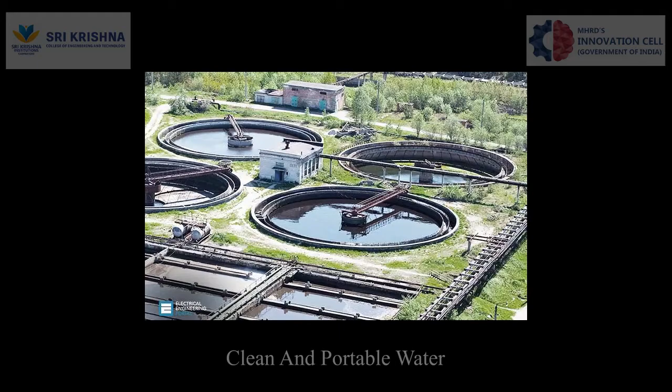Water pollution is the serious ecological problem we face today. Many countries are facing critical challenges to supply clean water without any pollution. Due to industrial development and changes in the manufacturing process, the water gets highly polluted and changes its physical and chemical properties, which creates harmful effects on all living organisms.

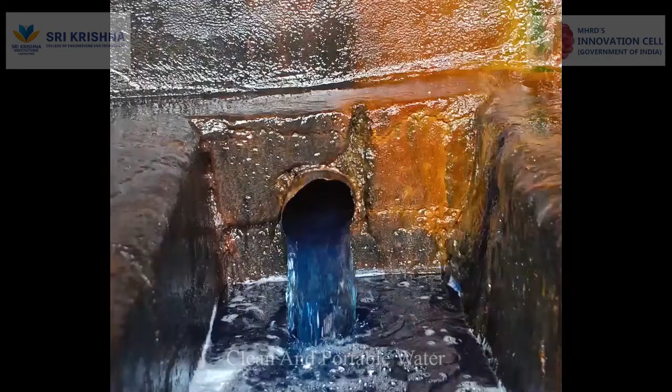Sugar mills, electroplating, tanneries, dyes, etc. are the major polluting industries which generate too much volume of wastewater with high toxic contaminants, disposed into natural water bodies without prior treatment.

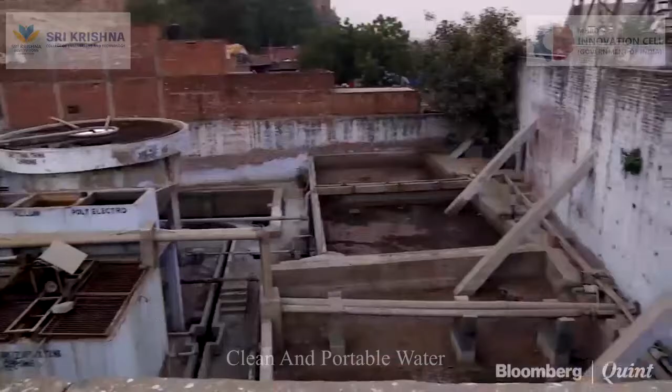A common ground for pollutants is their mode of entry into the water system. The waterways are subjected to entry of pollutants by direct discharge into the river water system, reactions and transport across the air-water interfaces, runoff and seepage with subsequent transport, and reactions and transport across the water-sediment interface. Under all conditions, entry of the pollutant is either in dissolved or particulate form or may be converted to these forms by chemical reactions.

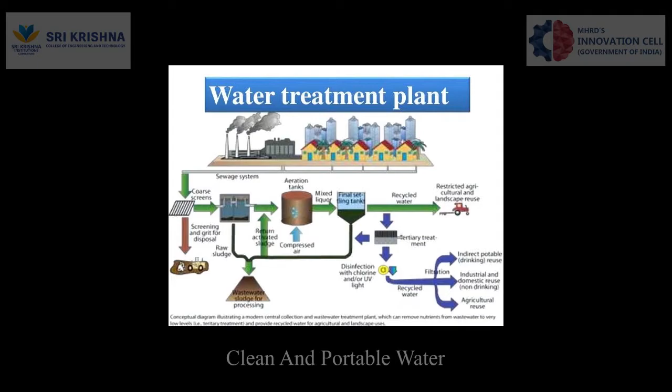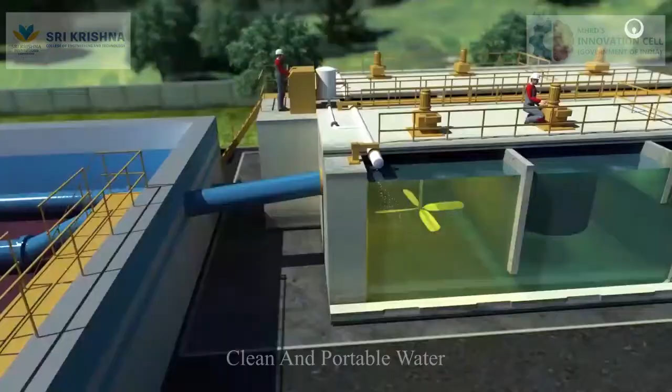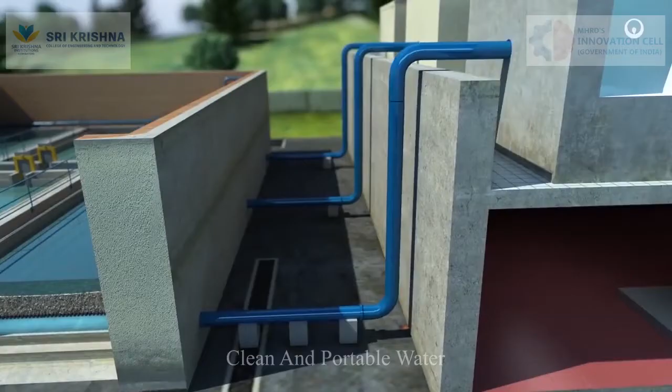There are many methods available to treat the wastewater, and they are generally classified into three different stages: primary, secondary, and tertiary treatment processes to remove specific contaminants. The water treatment methods used by industries are generally the same primary, secondary, and tertiary treatment methods used by municipalities. Many industries release wastewater of fairly uniform or predictable quality, and as the exact pollutants are known, it is often possible to choose the best treatment path for those particular pollutants. As new methods are invented or old methods improve, an industry can change to a better treatment.

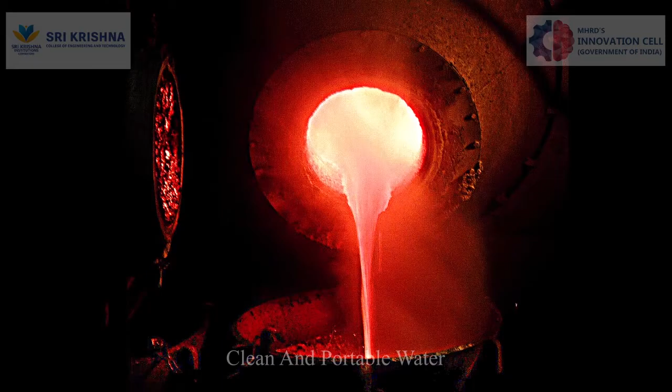Effects of heavy metal pollution. Mercury. In 1972, 300 persons were officially listed as its victims. Industries on the bank of the Kalu River, which originates in the Western Ghats, release a lot of mercury and lead. A child who drinks 1 liter of water consumes 35 ppm of mercury in a week. Over a period of several months, this leads to the accumulation of over 0.3 milligram of mercury, which leads to Minamata disease.

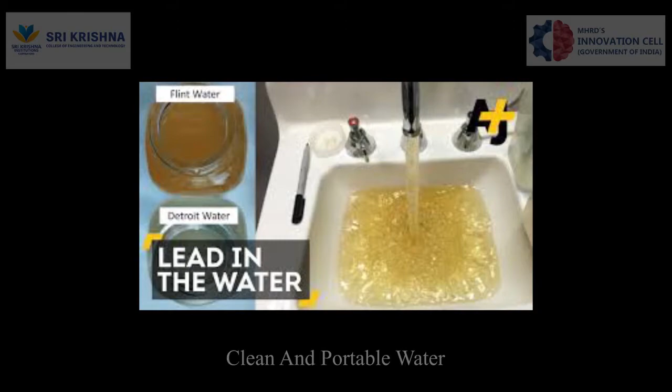Lead. In the last century, the mining and smelting of lead has increased above the prehistoric level. All this has led to mental disturbance reflected by crime and cultural degradation. Tap water contains quite a large amount of lead. Zinc. Even though zinc is an essential requirement for a healthy body, excess zinc can be harmful. Generally, increased exposure to heavy metals in the environment increases the risk of developing cancer. Chromium. Chromium is dangerous and may cause health problems including allergic reactions, skin rash, and nose irritation.

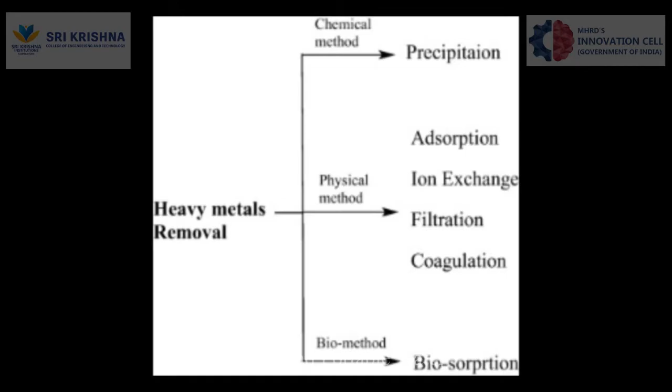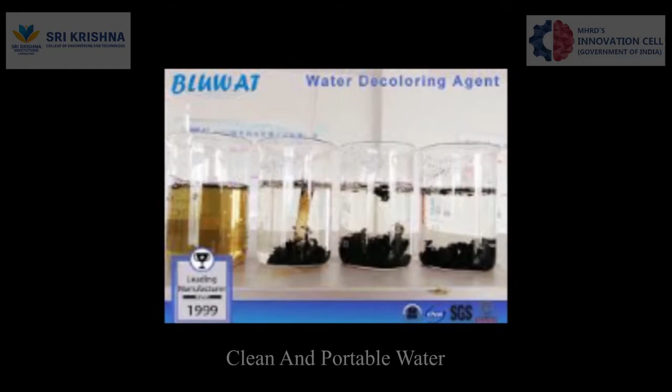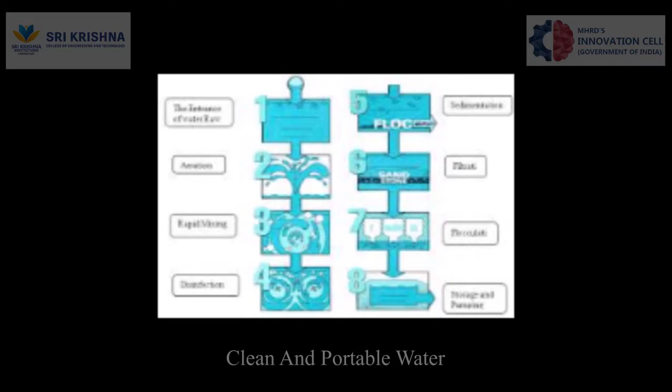Methods of removing heavy metal ions. Removing or reducing the heavy metal concentration from the aqueous medium is one of the challenging tasks for researchers. There are many methods suggested by researchers and scientists to remove accumulated heavy metal ions from aqueous solutions as well as industrial effluents. Due to the lack of laboratory facilities, the need for skilled persons, the availability of various chemicals, and the cost of the treatment process, many of the methods were not used efficiently by researchers.

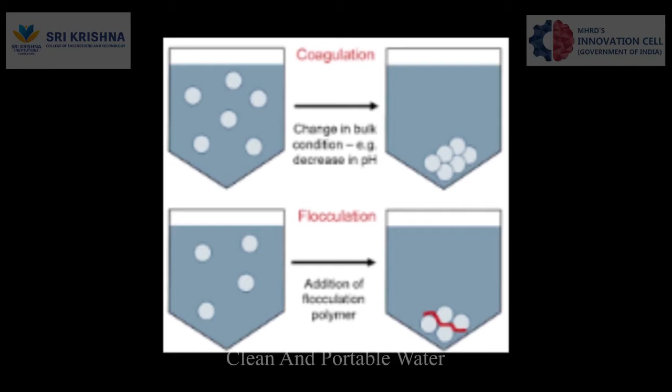The following are the major treatment methods used in recent days to reduce or remove the toxic metal concentration from the aqueous medium: activated sludge process, chemical precipitation, coagulation and flocculation, electrochemical treatment, ion exchange, membrane filtration, and adsorption.

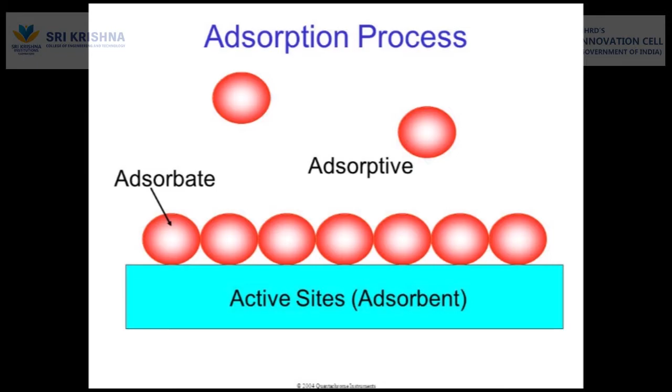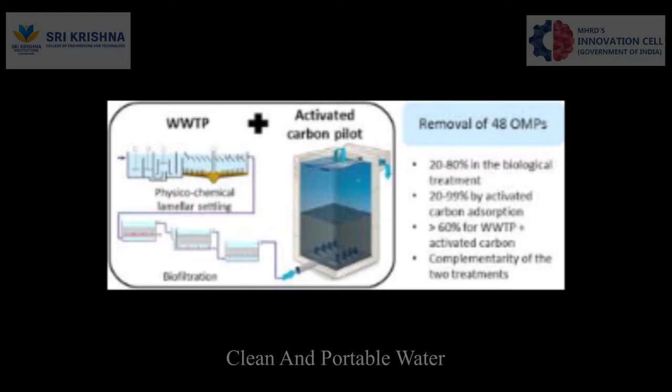Adsorption process. Adsorption is the adhesion of atoms, ions or molecules from a gas, liquid or dissolved solids to a surface. This process creates a film of the adsorbate on the surface of the adsorbent. Adsorption is a surface phenomenon, while absorption involves the whole volume of the material. The process of adsorption arises due to the presence of unbalanced or residual forces at the surface of the liquid or solid phase. These unbalanced residual forces tend to attract and retain the molecular species with which they come in contact.

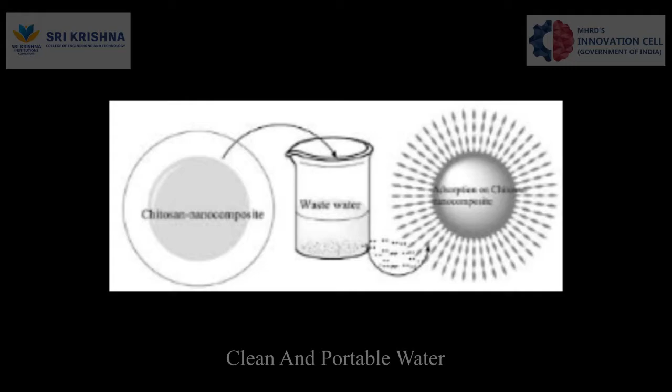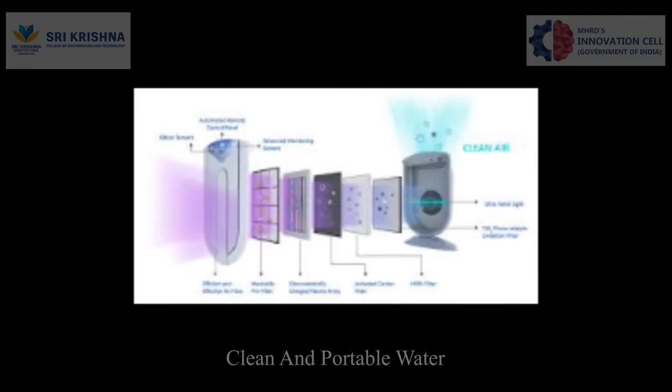Adsorption plays a significant role in many fields and promotes numerous chemical and industrial applications such as mixture isolation, air purification, water and wastewater treatment, industrial electrochemical cycles, heterogeneous catalysis, sugar processing, processing of vegetable oils, poison gases in the gas mask, etc.

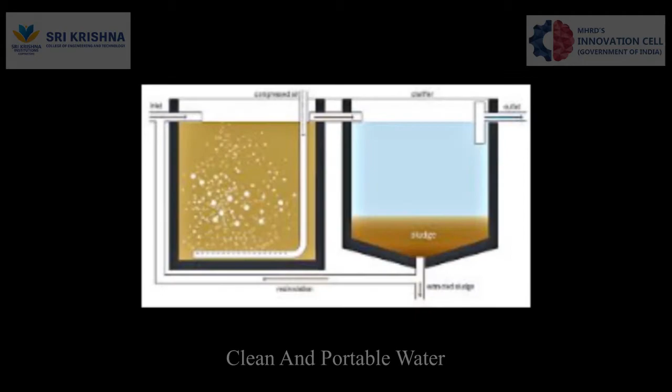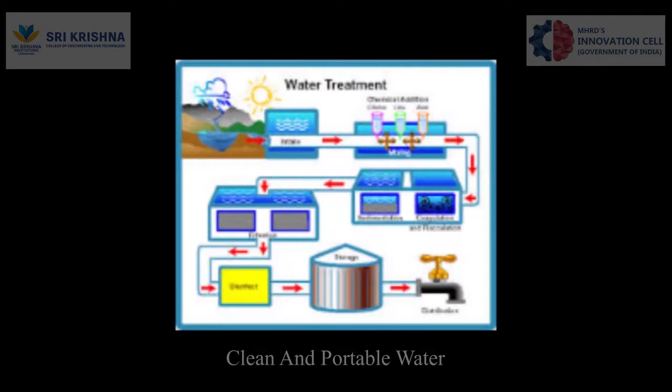It has advantages over the other methods. The design is very simple and the investment is also very low. Very low sludge is produced during the treatment process, but the activated carbon used in this technique may affect the adsorbed solids and desorption takes place. The other conventional treatment methods are successfully used for wastewater which contains a high concentration of heavy metal ions, except the adsorption process. It is difficult to attain the permissible limit of heavy metal ion removal from wastewater at low concentration.

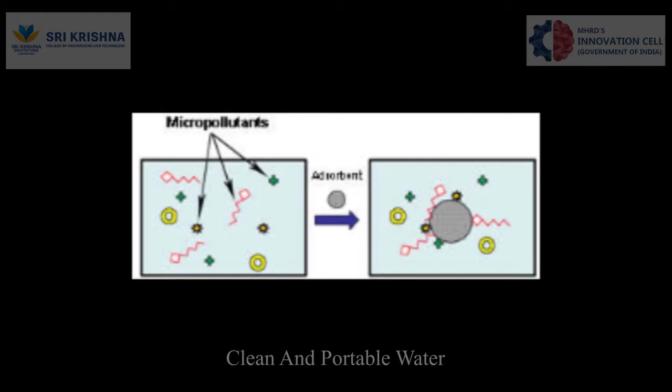The conventional methods are not effectively used due to the low efficiency, high cost and high energy consumption. Compared to the other conventional methods, adsorption has advantages like low cost, insensitivity to contaminants and flexibility in the design and operation. Also, this process does not result in the production of harmful substances as byproducts.

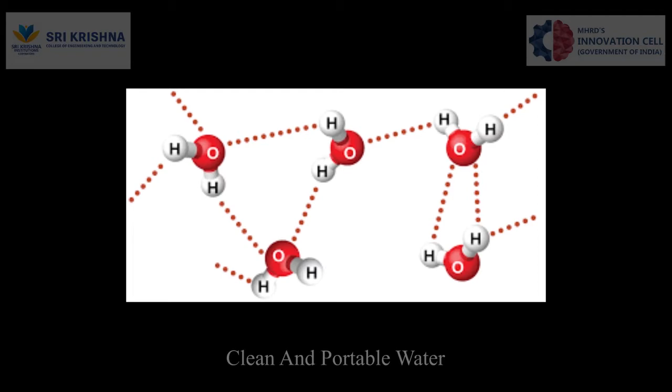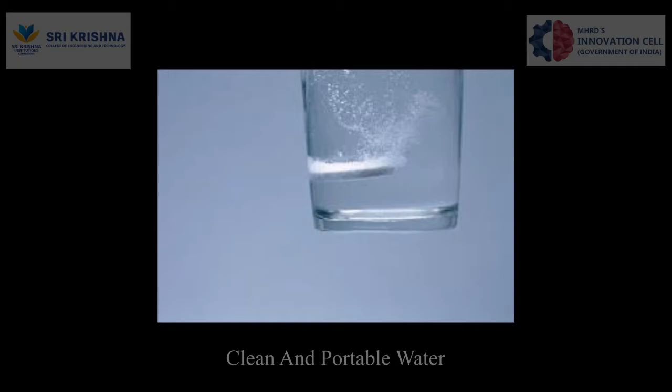On the surface of a liquid or solid, the molecular forces are in unbalanced or unsaturated conditions. To satisfy the residual forces, the surface of the solid comes in contact with molecular or dissolved substances due to this unsaturation. Because of this activity, a higher concentration of a species is present on the surface than in the bulk. This concentration of surface phenomena on any medium is called adsorption.

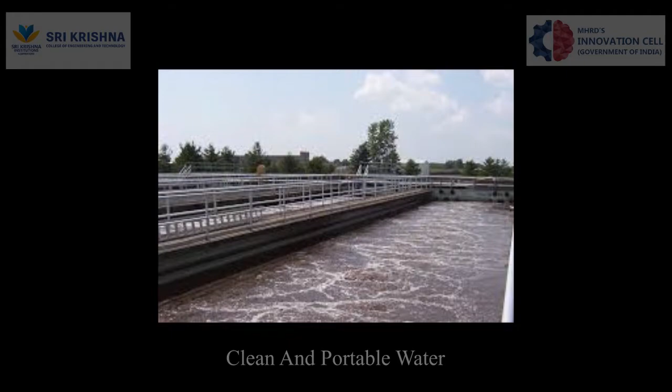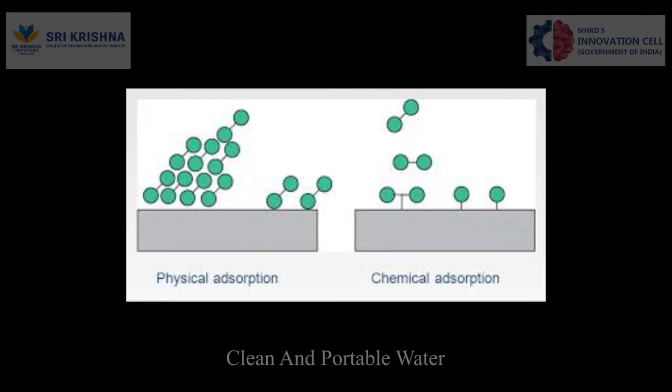This is a unique process to remove the organic and inorganic substances from the wastewater. To treat the biodegradable and non-biodegradable matters in the wastewater, most of the physicochemical methods have been used. The activated carbon adsorption is in both granular and powdered form. The following types of adsorption may be distinguished: physical adsorption process, chemical adsorption process, activated adsorption process.

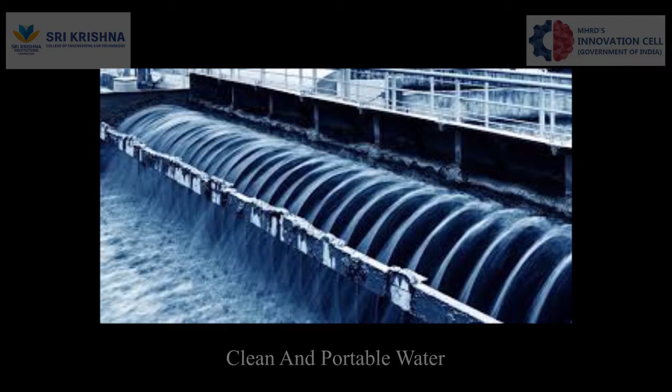From the organic waste, the carbon can easily be derived with very low cost and it's preferably suitable for the removal of toxic contaminants from the wastewater. In this world, the utilization of natural waste is very low and has been a serious management problem. Hence, the production of adsorbent and activated carbon from the natural waste serves many useful purposes.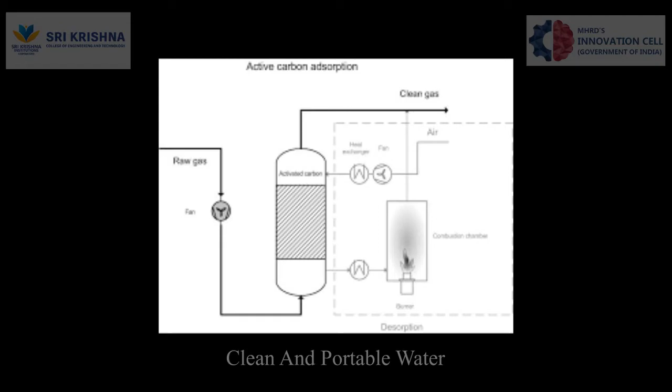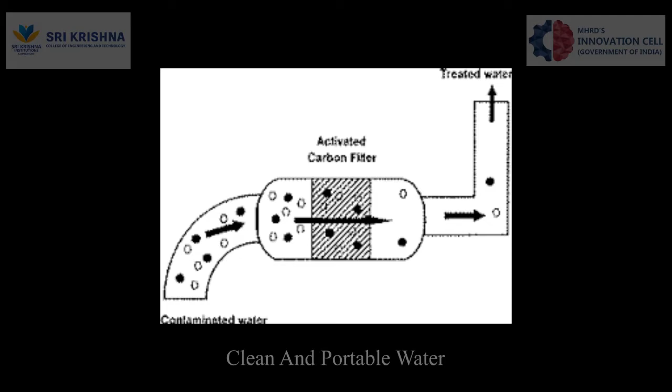The investigation includes batch mode, fixed bed, and column studies. However, the batch studies have been used to find out the adsorption capacity and its efficiency. From the batch studies, the adsorption isotherms are derived, and it is conventionally a preliminary test before starting the column studies.

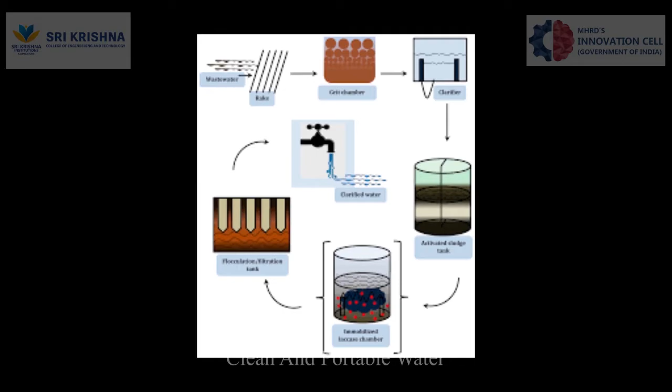Objectives: to prepare the adsorbent from tendu leaves and convert them into the raw powder form, to prepare the granular activated carbon from tendu leaves powder by adopting different activation processes, to characterize the raw powdered adsorbent and activated adsorbent and evaluate the suitable adsorbent for the removal of heavy metals such as hexavalent chromium, lead, and zinc from the aqueous solution,

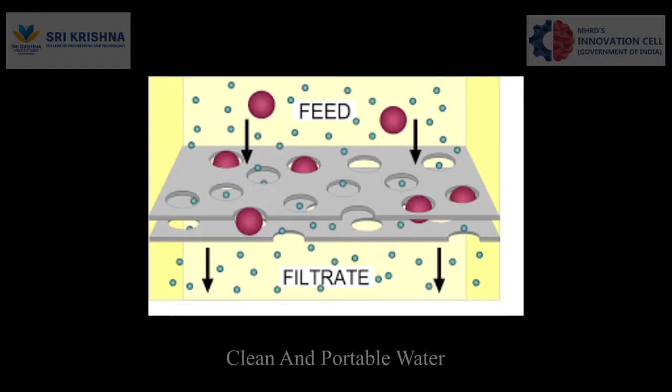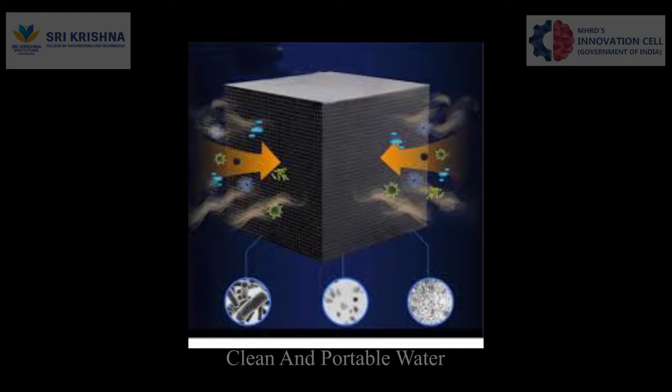to study the impact of variables such as pH, contact time, adsorbent dosage, concentration, and temperature on the adsorption efficiency for heavy metals removal through the batch experiment, to convert the most convenient adsorbent from micro to nano in size using iron oxides for increasing the efficiency of the adsorption process, to study the effect of rate of flow and depth of the bed for the removal of heavy metal through fixed bed column analysis, to apply the optimum condition to the industrial wastewater for the removal of heavy metal concentration.

Tendu leaves. Tendu leaf, which is an ecological contaminant produced during most of the manufacturing of Indian raw tobacco, needs this inquiry. A bidi is thinner and cheaper than a cigarette and is called a poor man's cigarette in India. A bidi is an Indian raw cigarette in which tobacco is wrapped in a cut part of the tendu leaf and tied with a cotton cord.

Tendu leaf is used as a bidi foil because of the ease with which it can be wrapped and its easy availability. It also has a good flavor, tolerance to oxidation, and fire retention capacity. Approximately 7,200 tons of tendu leaf waste are produced annually in the industrial town of Solapur, India.

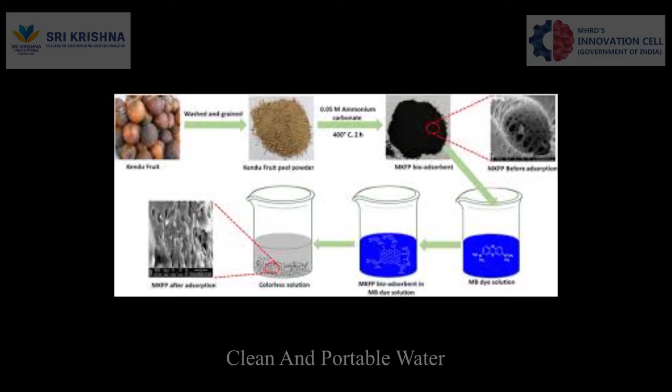Preparation of adsorbent. Activated tendu leaf powder. The adsorbent is cleaned with distilled water, followed by sun drying, and dried in the oven at 60 degrees Celsius for 3 hours. To increase the adsorption efficiency and stability, the raw tendu leaf powder is again treated with distilled water and concentrated sulfuric acid for about 24 hours. Then, this mixture was filtered with Whatman filter paper and placed in the hot air oven at 80 degrees Celsius for about 10 hours.

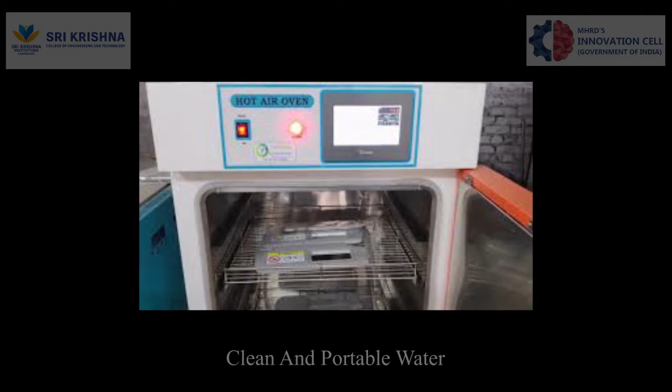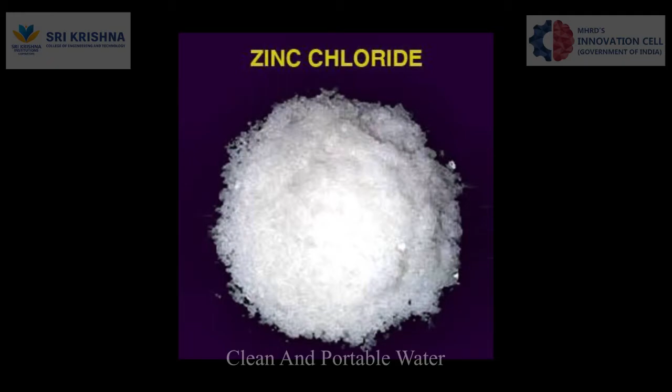Preparation of metal ion solutions. The stock solutions of metal ions such as chromium(VI), lead(II), and zinc(II) were prepared by dissolving the calculated amount of potassium dichromate, lead nitrate, and zinc chloride respectively in double distilled water. To obtain various desired concentrations, the prepared solution is diluted with double distilled water.

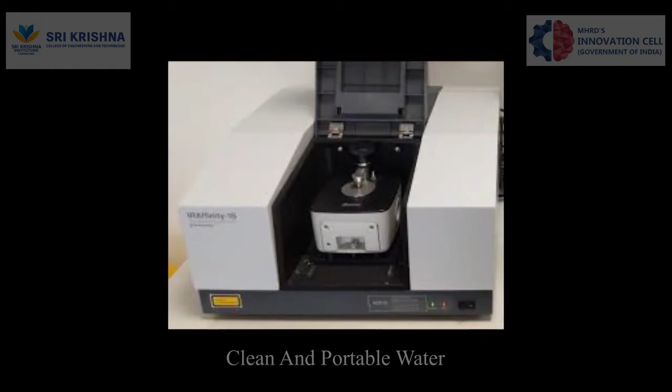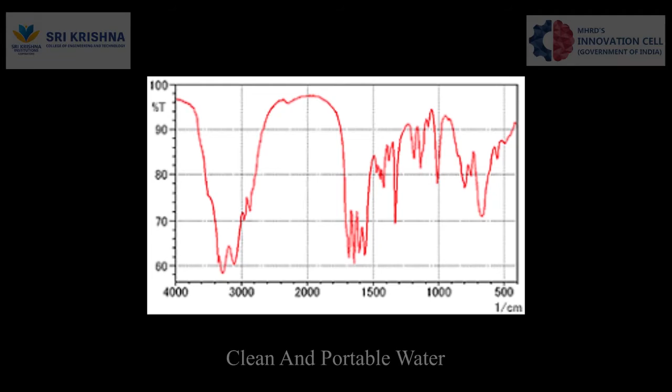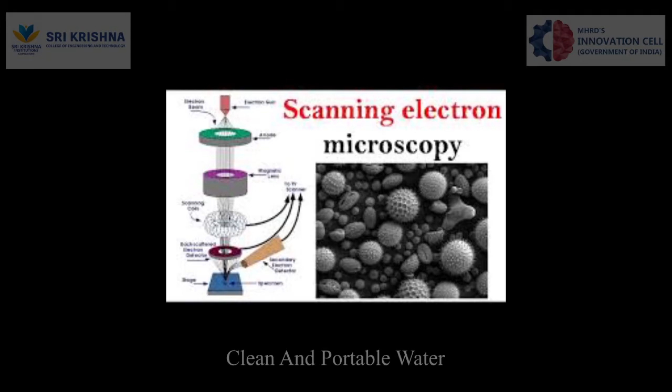Instrumental analysis. Fourier transform infrared spectroscopy analysis was done by the potassium bromide pellet method in the spectral range of 4000 to 650 cm inverse for the adsorbents to find out the infrared spectrum of absorption or emission. An FTIR spectrometer was used for this entire FTIR study. Scanning electron microscope analysis was used to find out the surface morphology of the adsorbent by the Leo Gemini 1530.

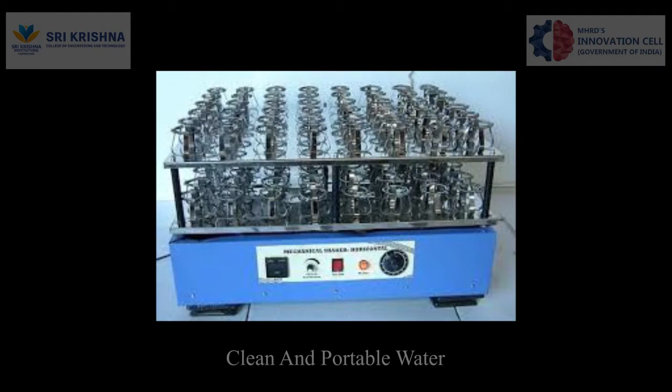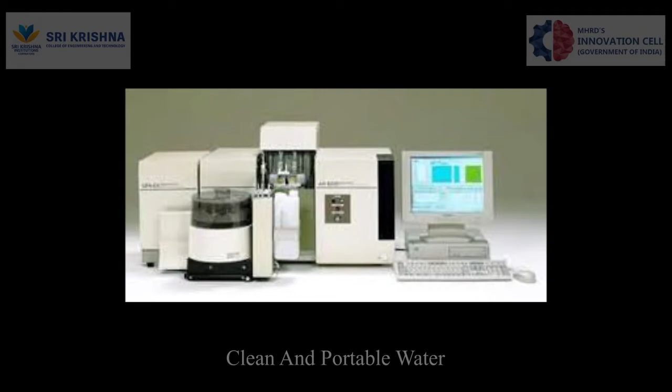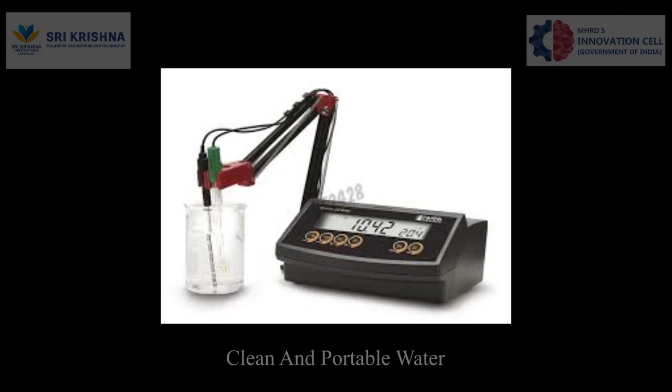The SEM instrument was used at a working distance of 10 millimeters and a voltage of 15 kilovolts. An orbital rotary laboratory shaker was used in the entire batch adsorption studies with a constant stirring rate of 250 rpm. The atomic absorption spectrometer AA6300 made by Shimadzu was used to find out the concentration of the heavy metal ions in the aqueous solution before and after equilibrium. Using a HANNA pH meter with a combined glass electrode, the solution pH was measured at various levels.

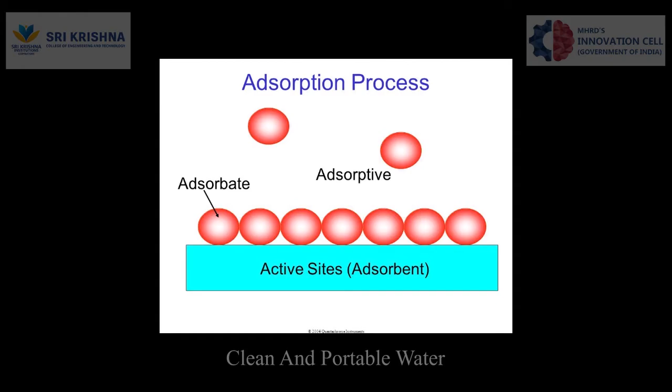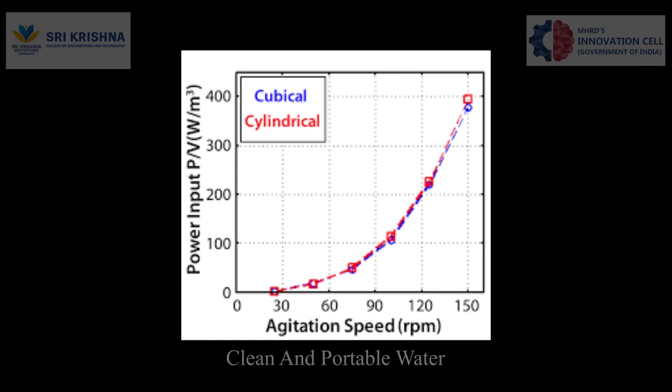Conclusion. The adsorption of chromium, lead and zinc has been investigated from the industrial effluent using tobacco leaves powder as an adsorbent. The maximum removal efficiency of 99.6% of chromium, 75.21% of lead and 94.22% of zinc was attained at a pH of 2. The optimum adsorbent dosage level is 2 grams per liter, contact time of 50 minutes, initial concentration of the adsorbate 25 milligrams per liter, particle size of 10 micrometers, agitation speed 250 rpm, with a temperature of 30 degrees Celsius.

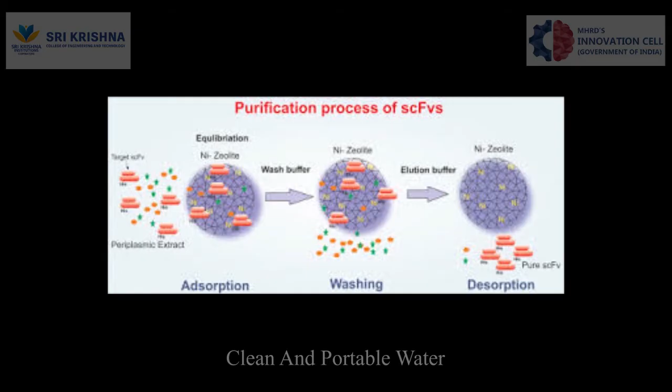Based on the discussion and results of batch adsorption studies, it is evident that tobacco leaves were found to be a suitable adsorbent for the removal of heavy metal ions chromium, lead and zinc. Hence, the selected adsorbent was used in the continuous fixed bed column for further studies.

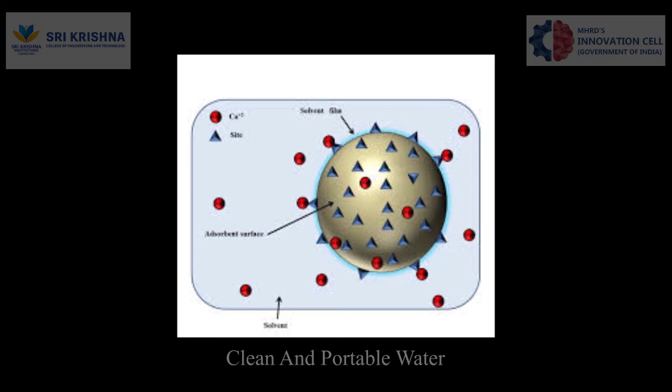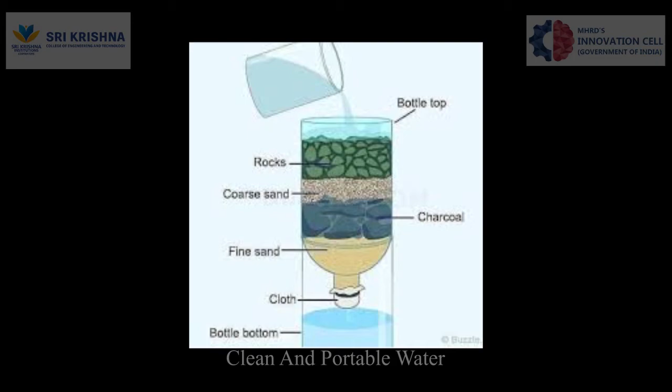The column is filled with fine sand followed by cotton at the top and bottom. Before applying the adsorbent bed into the column, a known concentration of heavy metal ion solution was passed to find out the changes in the efficiency of the adsorption process due to the presence of sand and cotton. This represents the changes in the efficiency of adsorption before and after passing into the column without the adsorbent bed. It was found that the efficiency has not changed from its initial concentration. Hence, sand and cotton do not play any vital role in the adsorption process.

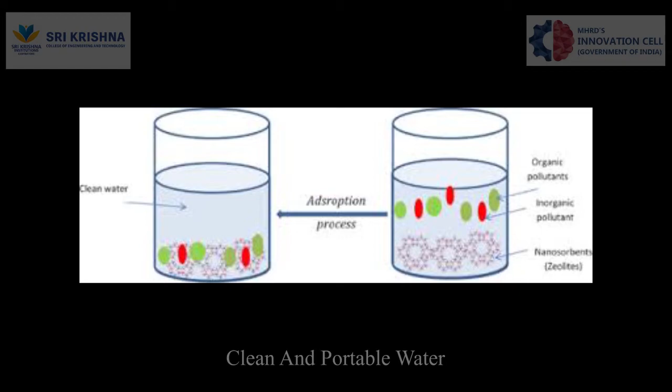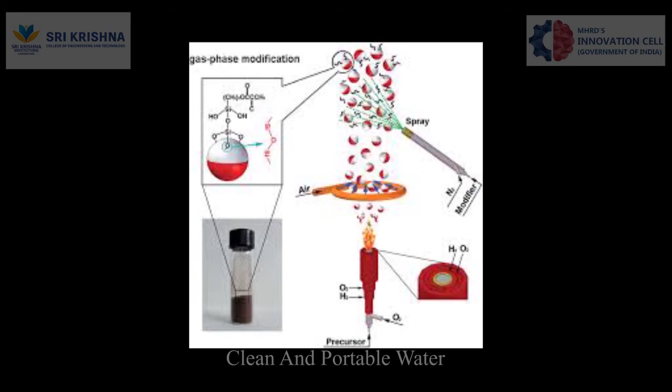Preparation of nanoadsorbents from organic material is one of the challenging tasks in modern technology. Many methods such as ball mill grinding, co-precipitation, chemical vapor deposition, flame synthesis, etc. were used to convert the size of the particles from microscale to nanoscale. But iron-based nanoparticles are commonly used to remove toxic heavy metals from aqueous solution. This is a very simple and cost-efficient method which does not produce any secondary contaminants.

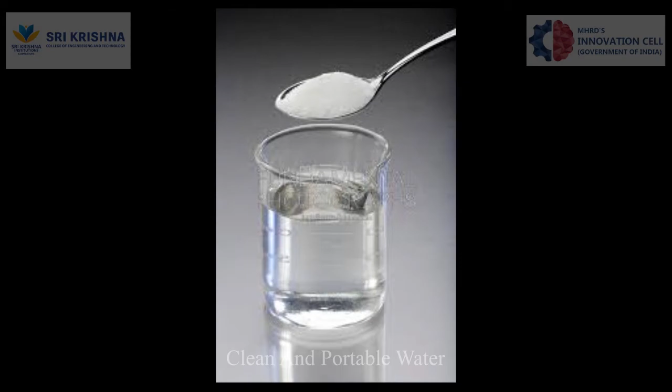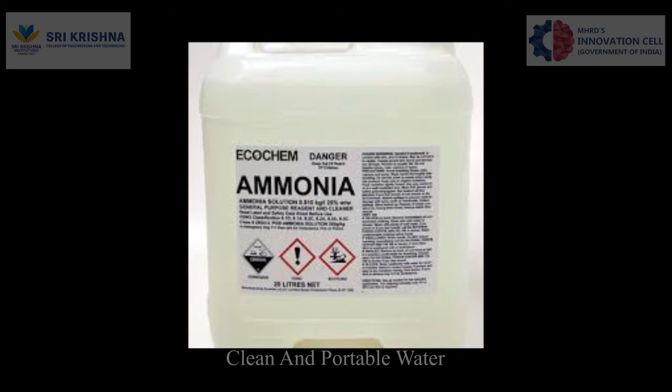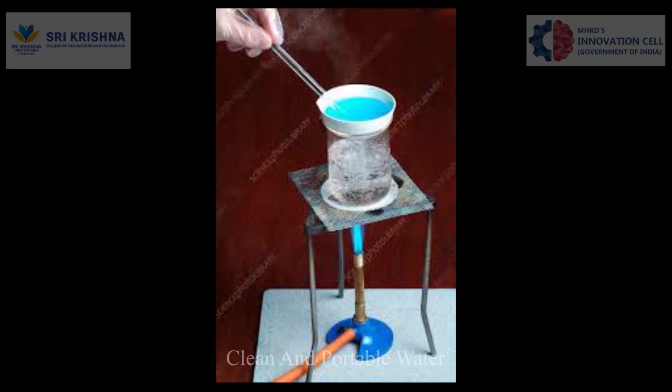The surface area properties can be increased by modification of materials, dissolving in the ratio of 1:2 the solutions of ferrous sulfate heptahydrate and ferric chloride hexahydrate in distilled water with magnetic stirring under heating at 80 degrees Celsius. The iron oxide nanoparticles were prepared. Further, 10 ml of ammonia solution was added to the heated solution and the mixture was added to 15 grams of ground tobacco leaf powder. Then the solution was heated up to 80 degrees Celsius with constant stirring for 30 minutes in the muffle furnace.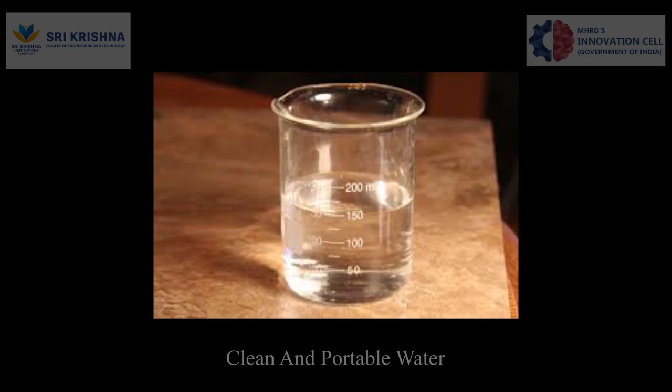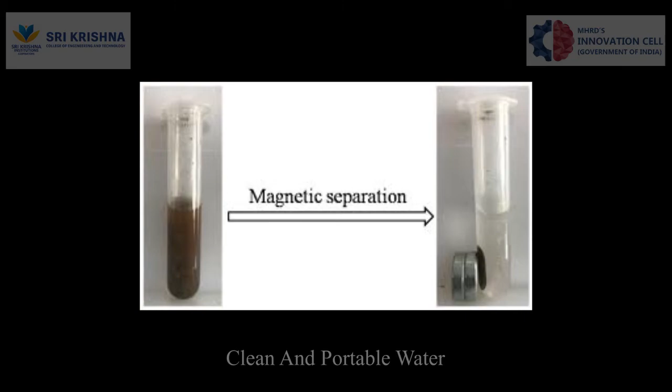Finally, the suspension was taken and cooled at room temperature, followed by washing and cleaning. The washing can be done using ethanol followed by distilled water for removing the black precipitates, separation and organic matrix held in loose conditions. In the magnetic nanoparticles, the unwanted residual particles were removed using the magnetic separation technique. The sample was heated in an oven at 80 degrees Celsius for drying, and the particles were collected and used for investigation of heavy metal removal from the industrial effluent.

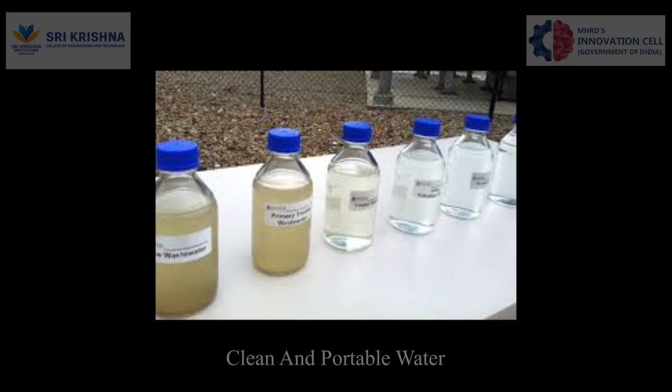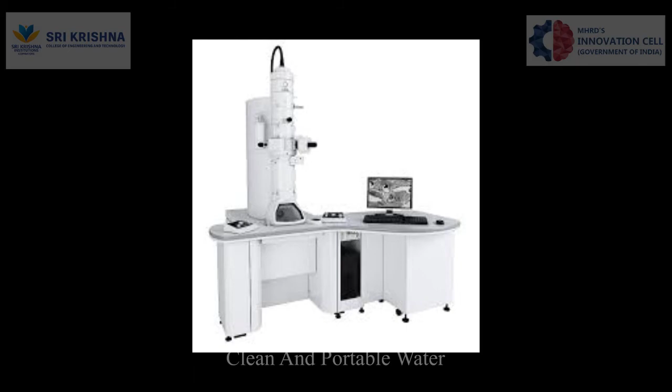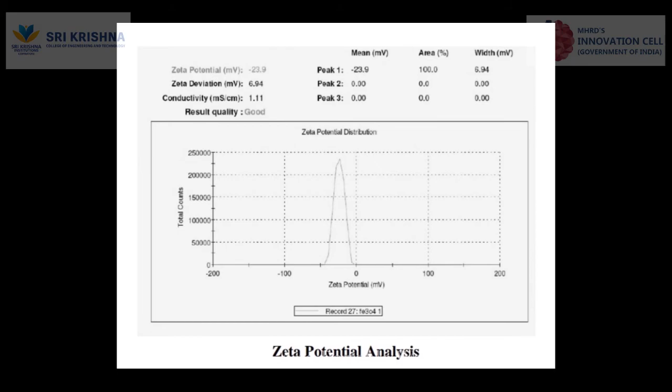Analysis of nanoadsorbents. For analyzing the size of nanoparticles in the column studies and capturing the fine sample and its details, a JEOL JEM 1400 Plus transmission electron microscope was used. For confirmation of nanoparticle stabilization, these particles were subjected to zeta potential analysis to check whether the particles are polydisperse or monodisperse in nature. TGA and DTA analysis was performed to ensure the organic capping of nanoparticles. BET analysis was also carried out for analyzing the porosity and surface area of nanoparticles.

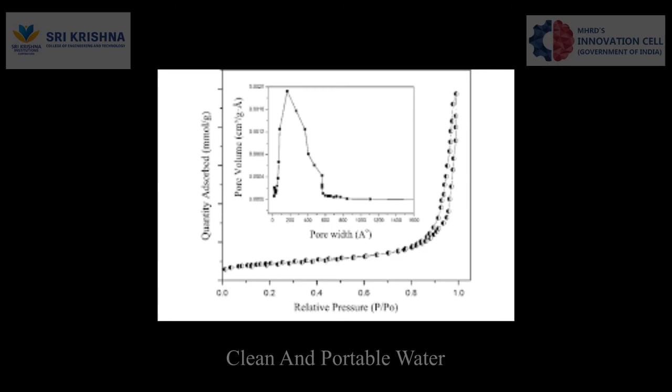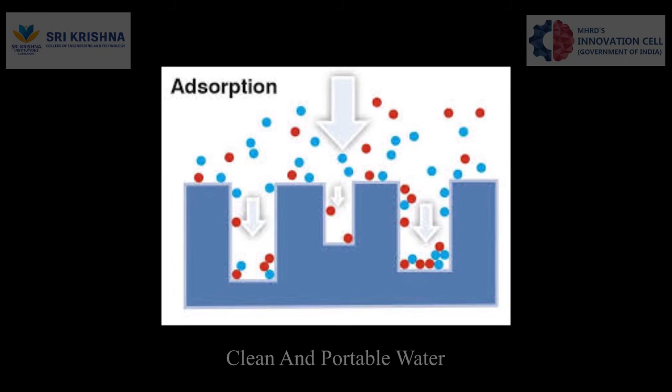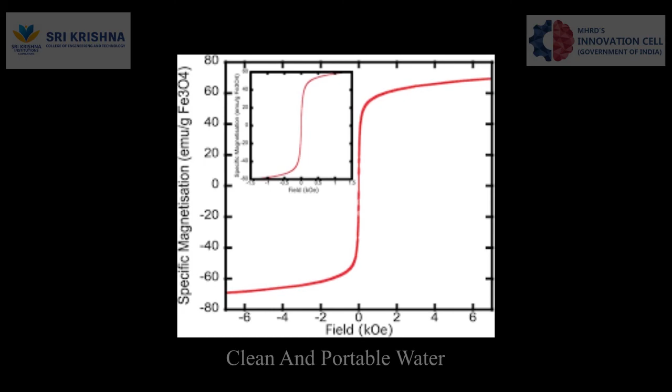The crystalline structure of nanoparticles was obtained using the X-ray diffraction method. The occurrence of metal ions on the adsorbent surface has been investigated by energy dispersive X-ray spectroscopy. Also, to understand the hysteresis and magnetization of nanoparticles, VSM Lakeshore 7410 analysis was carried out. The samples shown in the figure are collected from electroplating industries and other industries situated in and around Coimbatore.

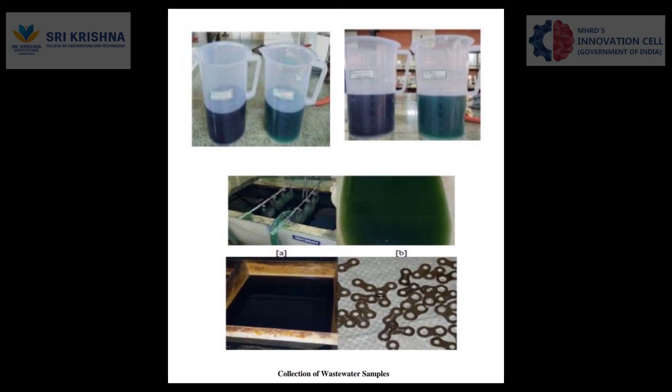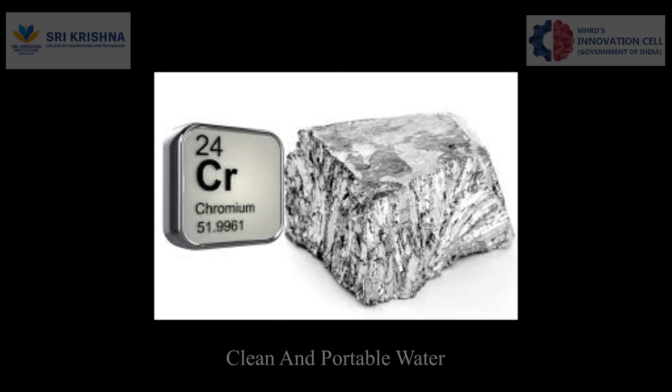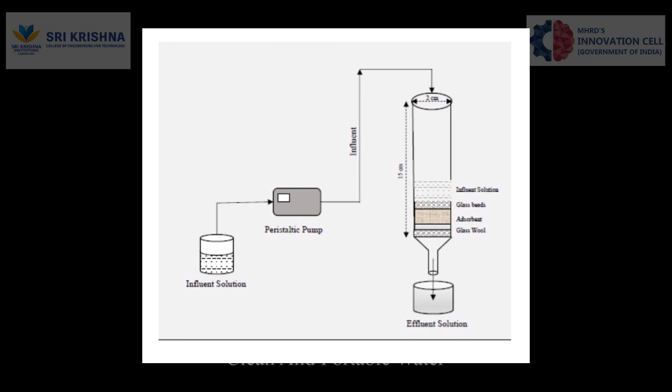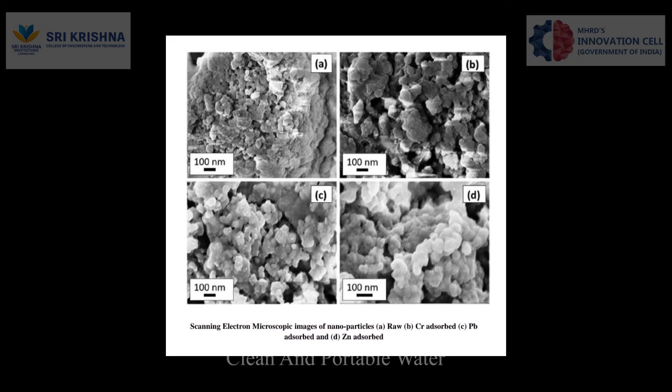The column studies were carried out in fixed bed type with varying heavy metal concentrations of 100, 200 and 300 mg per liter for chromium, lead and zinc respectively. In this entire study, the flow rate was adjusted from 5 ml per minute to 10 ml per minute with varying bed heights of 5, 7.5 and 10 cm. From the above observations, the maximum adsorption efficiency was obtained for chromium 92.26%, lead 75.57% and zinc 89.36% with the following optimum conditions. The optimum flow rate is 5 ml per minute, optimum bed height is 10 cm, and the optimum level of metal ion concentration is 100 mg per liter.